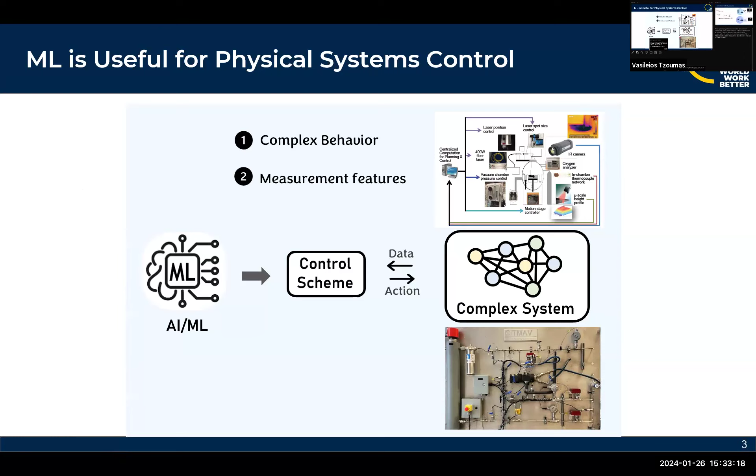Okay, so. Can you swap the slides? So, okay. Seems to be no option for that. How to do this? I'm not an expert. Yeah, okay.

All right, so, but we have problems with using the big data approach because generally you need a lot of data. And in addition, with the myriads of parameters you want to learn in AI, machine learning, big data approaches, it's hard to explain what's going on and therefore hard to provide certain certifications. And if you need to adapt your models in real time, it may be difficult to train in real time.

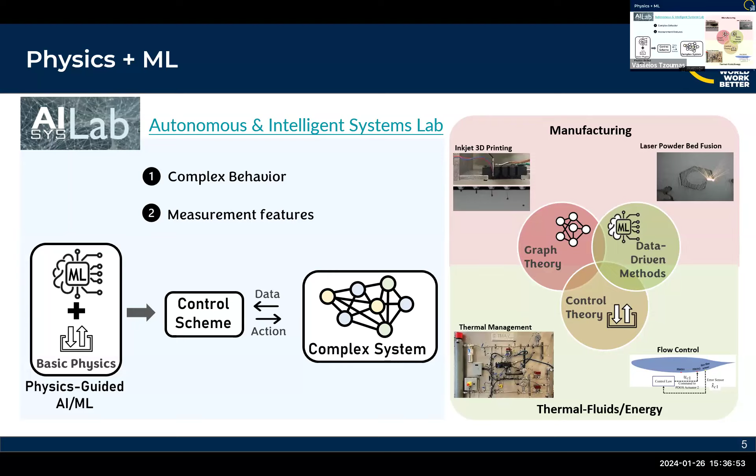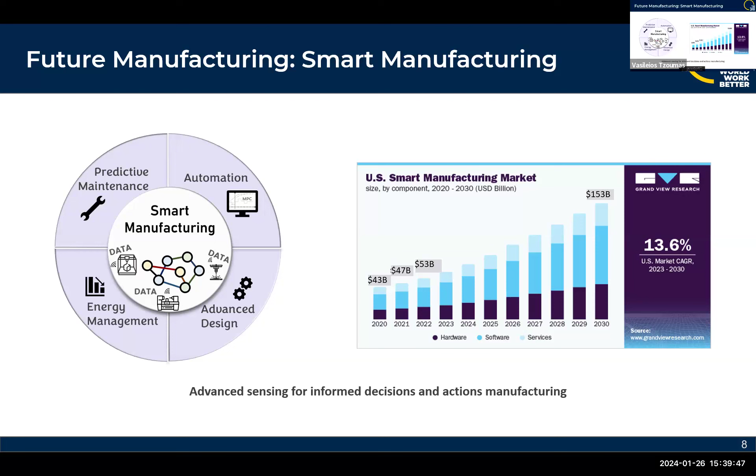Our manufacturing systems in general are becoming increasingly smart. And by smart, I mean there are additional sensing capabilities to enable us to actually do predictive maintenance, automation, advanced design, and energy management. And the smart manufacturing market is expected to grow substantially. At the same time, the manufacturing processes themselves are also becoming increasingly complex, especially with the advent of additive manufacturing.

We're able to combine additive manufacturing processes with other conventional processes, which is sometimes called hybrid manufacturing, or we're able to actually mix multiple materials in one monolithic part. The question here is, how do we use data to better understand and control these increasingly complex dynamical systems, given also the increasing amount of sensing capabilities we have?

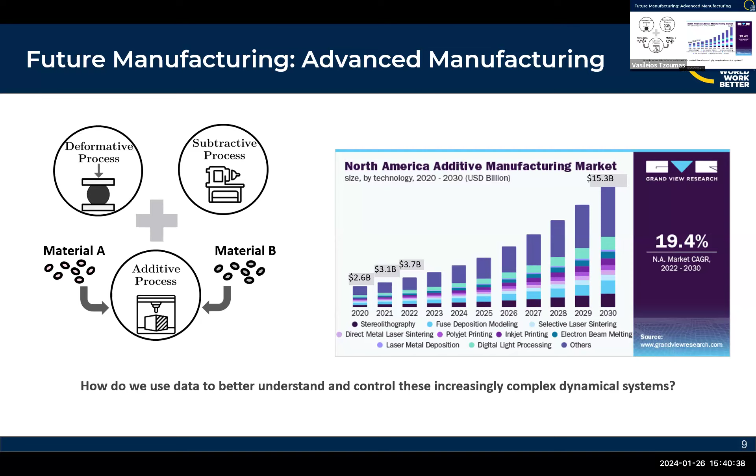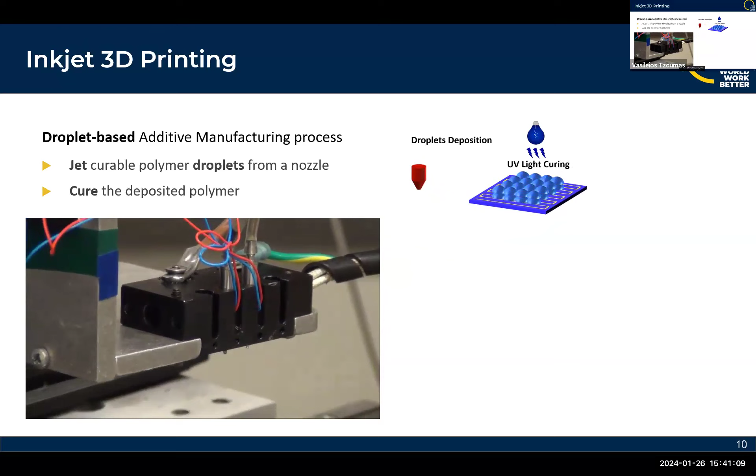So I'm going to talk about how we think about doing this in inkjet 3D printing. It's an additive manufacturing process that's droplet-based. It involves jetting curable polymers from a nozzle and then curing the deposited polymer. So typically, in the video shown here, you've had the droplets deposited, and then it's going to get cured. After curing, the process repeats.

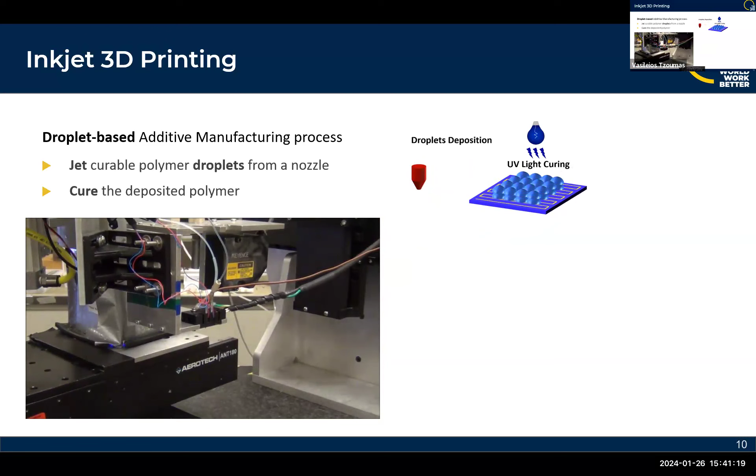This process is important for making parts useful for medical and dental fixtures, compliant features, robots, micro electromechanical devices, and very useful in bioprinting.

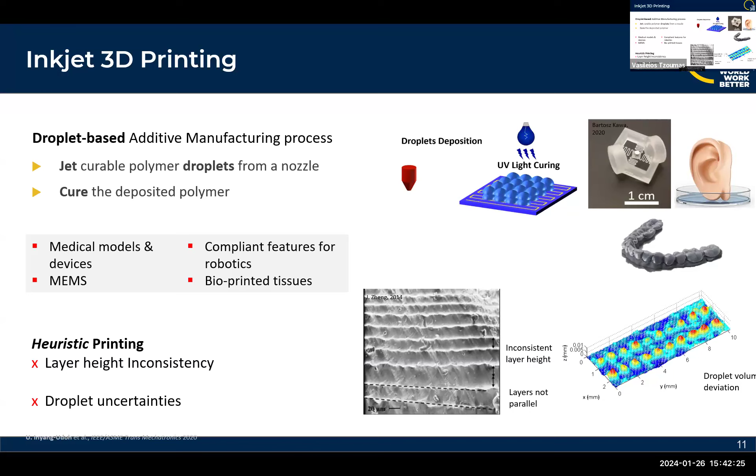Typically you carry out this process heuristically. You choose all the right combination of parameters and hope for the best. The problem is you may have layer height inconsistency, which this microscope image shows, and there are a lot of uncertainties in droplet deposition. You're meant to have equal droplet volumes, but there's a large standard deviation if you take the mean of the droplets.

This calls for controlling the process, but there are two perspectives to think about. First, low-level process parameter control, where you try to change or modify process parameters like the voltage waveform, pressure, jetting frequency. In our case, we have a piezoelectric nozzle, so voltage is important in driving the droplets out.

It's really hard to model what these process parameters exactly do on the output metrics, especially in a way that you can go back from what you want to the process parameters. Several works have used things like iterative learning control, fuzzy logic, and neural networks to some extent to achieve a relationship between these parameters.

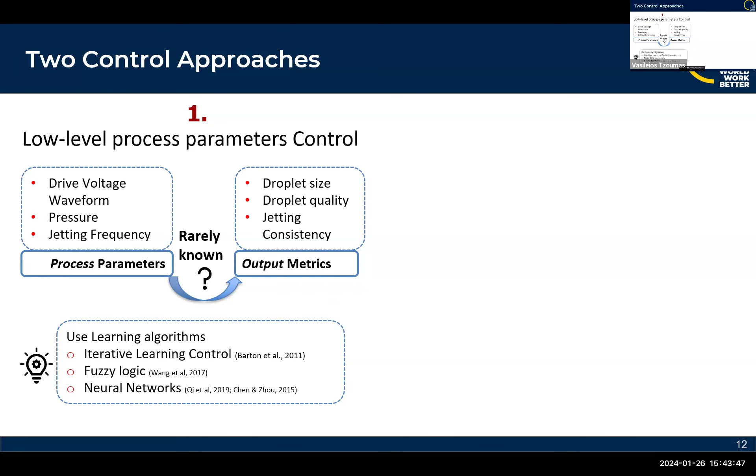But the second perspective, which is what I'm really interested in this talk, is geometry level control, where you're closing the loop based on the whole part geometry. So you're thinking from the input pattern you give to the output geometry that's produced.

The main thing you need to do here is understand the dynamics of the droplet deposition and interaction. It's very hard to do. There are finite element models for a couple of droplets, but in practice you're dealing with thousands of droplets. There are linear simplified, reduced order models suitable for controls, but they do not capture significant nonlinearities.

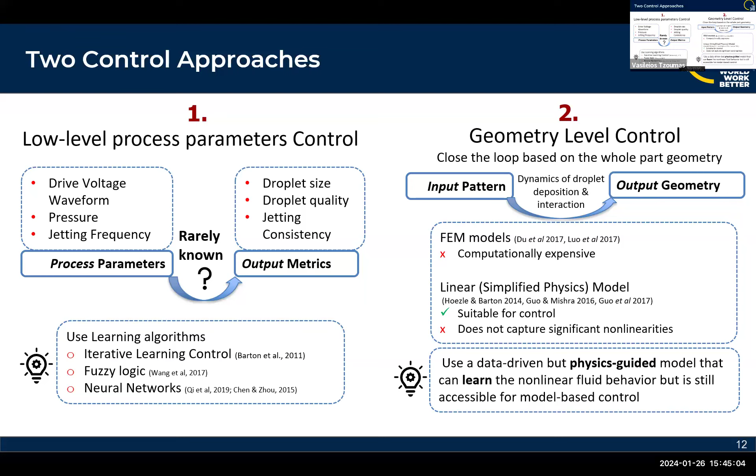So the idea here was to use a data-driven but physics-guided model that can learn nonlinear fluid behavior, but is still somewhat accessible for model-based control.

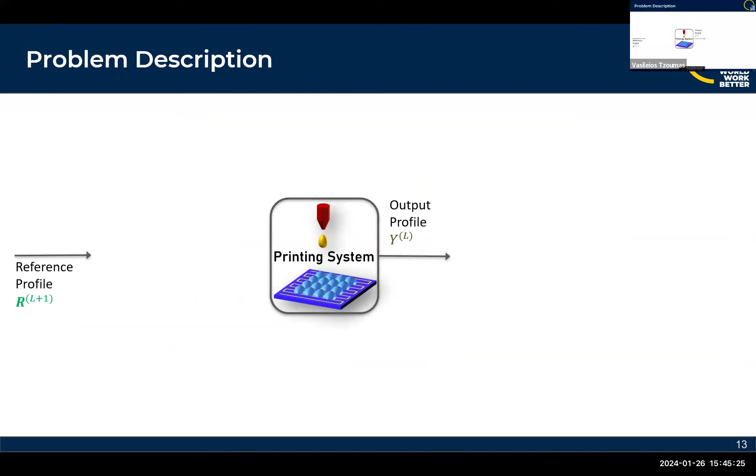If we think about our system, let's assume we just printed layer L, and we know the reference for layer L plus 1. For a model-based controller, based on YL and RL plus 1, we can generate input pattern UL that would give us YL plus 1. If we're interested in feedback control, we feed that back to the system and repeat the process.

So what we really need here is a model that relates the input pattern UL to the change in YL, that is YL plus 1 minus YL. I'm going to talk about two modeling approaches you could use for this.

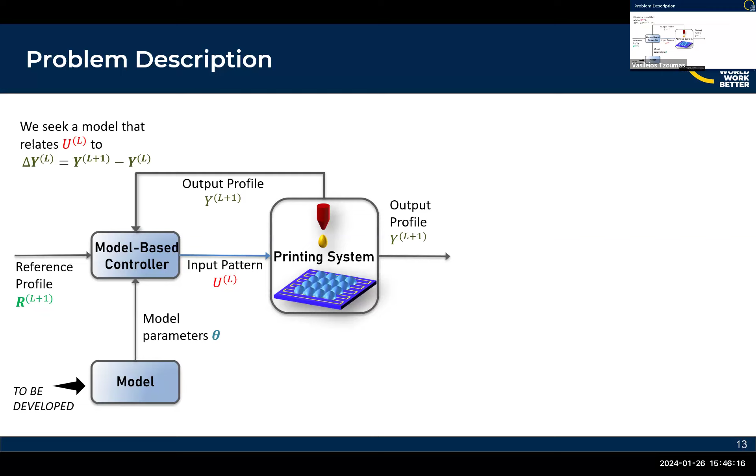And the drawbacks with them, to motivate why we're using a physics-guided machine learning model here.

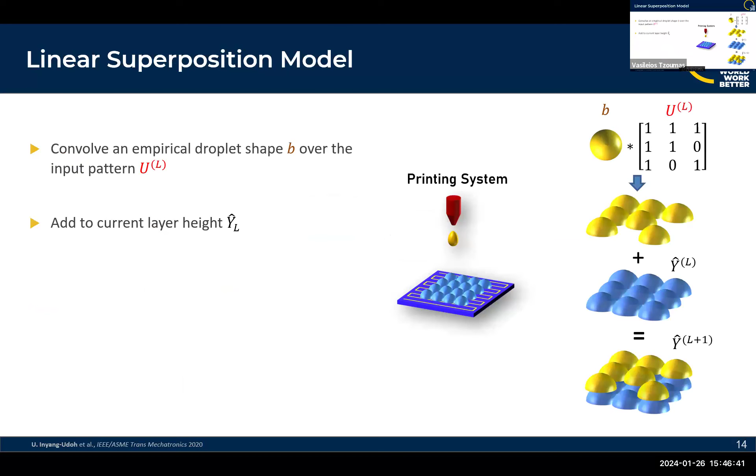The first is just to do a linear superposition model, which is very intuitive. Essentially you have a filter, you convolve it over the input space you're interested in, and add that to your current layer. But it doesn't work that well. This is a cross-shaped part: this is what the linear dynamics would predict, and this is the actual experiment.

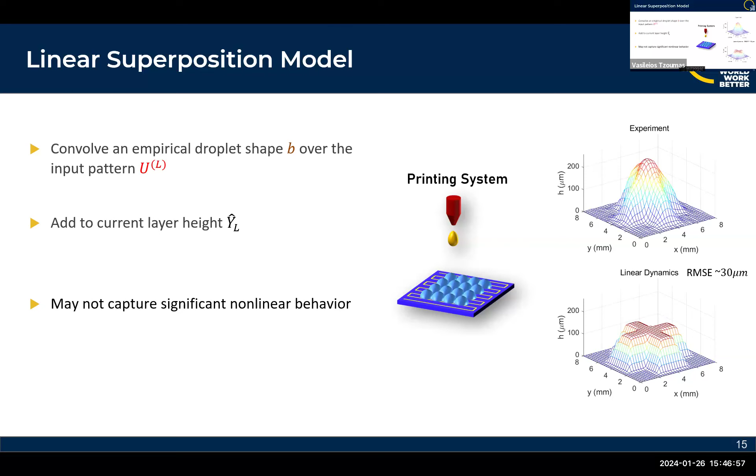The takeaway here is you really need much more data, and the more data you need, the more you need to increase parameters in your network. That's what led us to think about a physics-guided machine learning approach, where we combine data with some knowledge about the system modeling. That's what I want to talk about now.

If you think about the dynamics here, it's multi-scaled. There is a layer-to-layer development, and there is also a droplet-to-droplet evolution. We've been talking about the layer-to-layer development, but you could think about the droplet-to-droplet evolution, thinking about the process from that dimension.

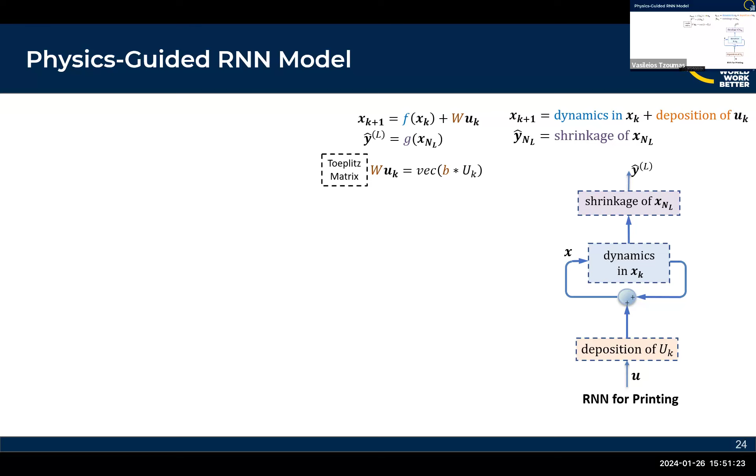We can write the input here, the input weight uk, as the convolution of B, filter B over uk. So W then becomes the Toeplitz matrix that corresponds to the convolution of B and uk vectorized. So we want to learn the convolution that captures the spatial effect of the deposition. That's what we have here as the input to the neural network.

But here's where the physics guiding is coming in. We want to learn that convolutional kernel or filter, but the convolution must be consistent with dynamics that reflect volume conservation, because we know there is volume conservation in the process, and a constrained flow, because we know there's surface tension constraining the flow when the droplets interact.

And so if you think about the input space as a grid with X there, and say we're interested in this point in red, we can transform the grid points in the domain that we're interested in into nodes of a graph. And then we apply an activation function that essentially is meant to constrain the flow.

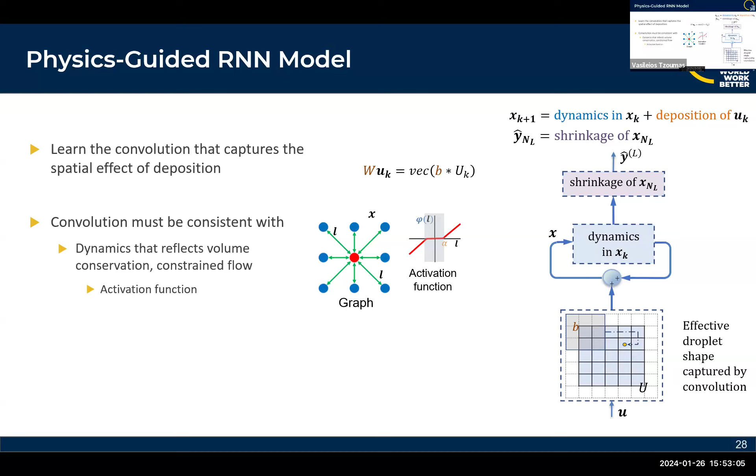And so this is the thresholding function we apply here as an activation function. So basically we're saying that if the height difference between any two nodes is not sufficiently large, it's in that dead zone in gray, you don't have flow. It has to be bigger than that to happen.

Okay, so we can write this as: we have the input, and then we have this incidence matrix, D transpose, acting on the state at any time, multiplied by the flowability matrix, essentially saying how much flow you will have in one time step.

So we apply this activation function that captures the effect of surface tension. And then we take the links back to the nodes domain by multiplying by the incidence matrix again, and that forms the recursion of the neuron.

So in all this, we don't know parameters B, F, alpha, and those are the parameters we'll need to learn.

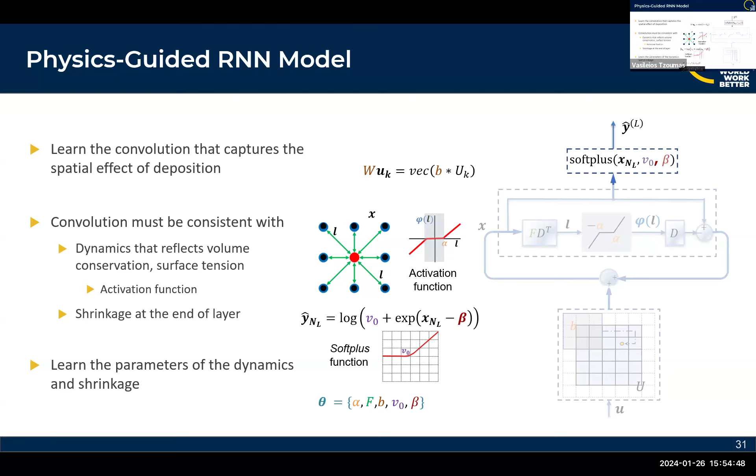So then to incorporate or to account for shrinkage at the end of the layer, we use this softplus function. It's important to emphasize that we're trying to learn the convolution B, the convolution kernel or filter, but we want it to be constrained by things we know about the process.

Okay, so we can write the convolutional neural network in this way, and we can unroll it as shown here. And one big problem with recurrent neural networks generally in training is that you could have very unstable gradients. So when you calculate the gradients, if the time step is very long, it could be exploding or vanishing gradients.

So in this case, what we're saying is that we're going to train the network based on the data we're storing. Either it's stored, or we even want to be able to train based on data on the fly, or online.

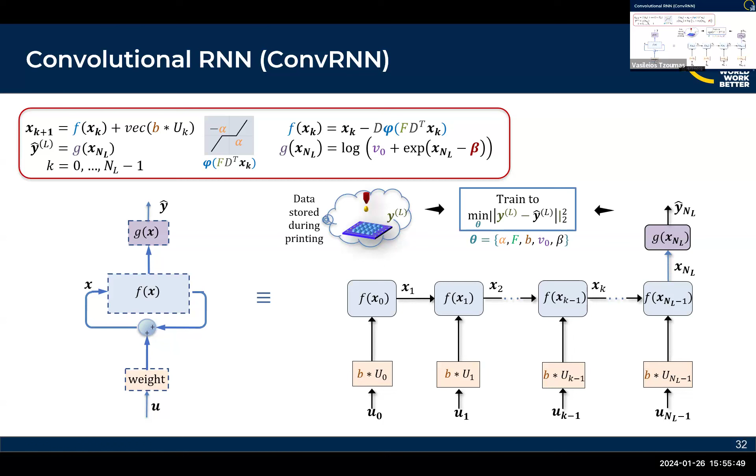Okay, so you've got this nonlinear discrete time system, and as I understand it, you're encoding conservation of the flow as constraints on the F and the D matrix. Is that right? Is it not, am I not understanding?

Yeah, so I mean, that's right. The other thing that we're even doing here is in the selection of what we're using for an activation function, we're making it reflect that, although we don't know yet the parameters alpha.

But in addition, what's interesting is that of course there are conditions under which you're going to have stable gradients, and it turns out it corresponds to conditions for the dynamics as well to be stable. So yeah, that's what we're trying to do.

Okay, so as I said earlier, training stability is a big concern, and we can show that if we have the big matrix F to be just a constant times the identity matrix, which is what we do in this case for simplicity.

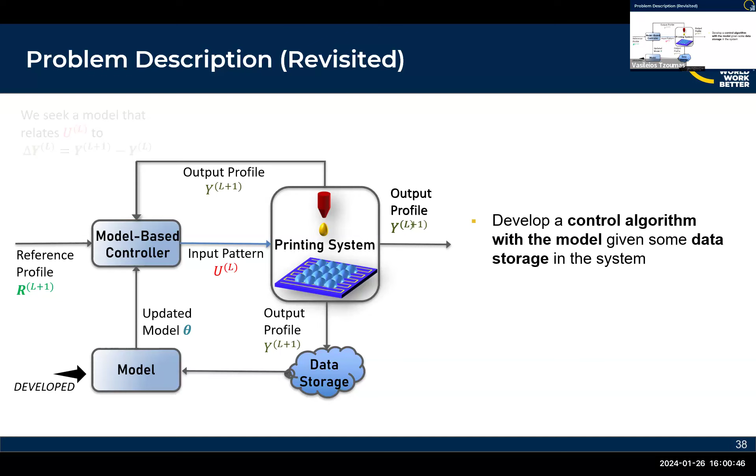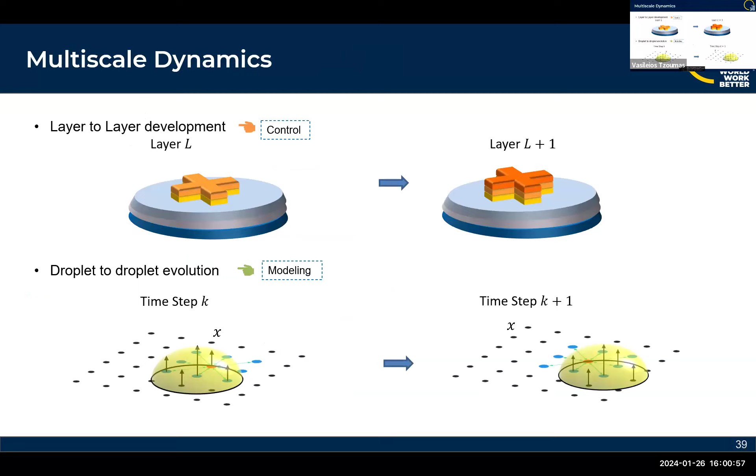As I said earlier, we have 2 time scales, and we've tried to model from droplet to droplet, but we're interested in controlling from layer to layer. So in order to do that, we basically need to take the time dependency away from UK and take it to BK, so that we are trying to really optimize with a certain U. And you could do some algebra and eventually arrive at this.

This convolution here is basically equal to BK UL. Well, we already know what BK is, so we can get BK for each time step because we already learned what the actual kernel is. So we can write the dynamics in this way with the matrix BK UL.

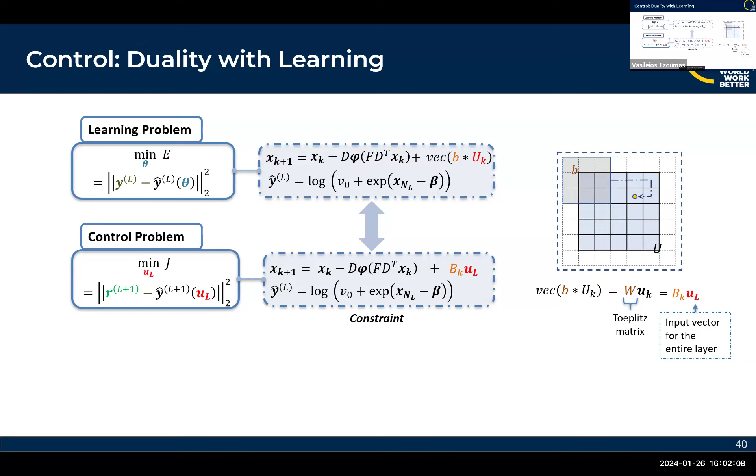And our control problem then becomes to get UL that minimizes the reference minus our prediction of the output profile. So basically, it's a reference tracking problem.

What's interesting here is that we basically need the same gradients, or most of the same gradient terms, that we used in getting the parameters as for the inputs. And we already showed that, in training, this term has a spectral radius less than 1, so it wouldn't explode. So we're sure that when we're trying to compute our controller, we'll achieve a result because the gradients are bounded. That's very important, because if the gradients are not bounded, you can't really guarantee that you can calculate a controller for the dynamics.

So if we think about it for Z time steps into the future, we can think of it as a model predictive control problem constrained with how much input you can put into the system. You can't have negative inputs, and there's a limit to how much you can get. And the gradients for all the time steps into the future is just the sum of that for each of the layers.

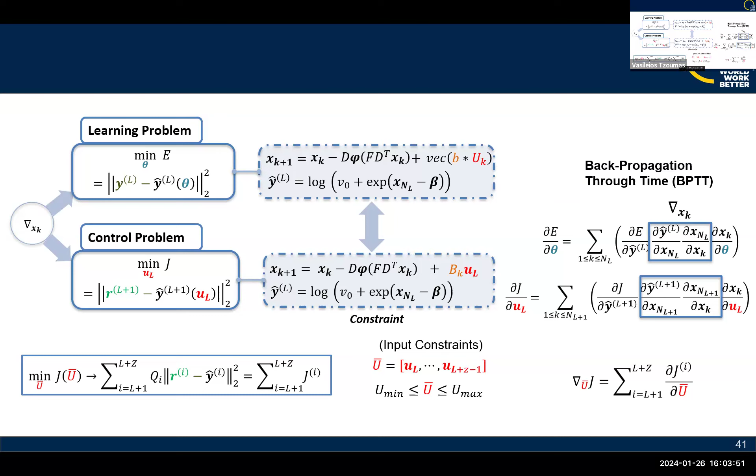So with this, we can get a predictive controller, and back to the big picture. Essentially, we have our system here, and we're trying to make control decisions based on the physics-guided model given data.

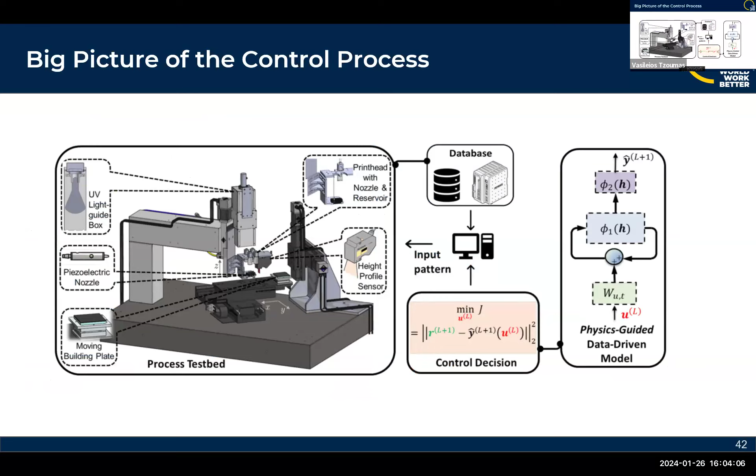So what we do here is we learn the parameters of the system theta based on a 4-layer cross-shaped part. We know the input pattern, we know the output, and we use that to get theta star. Then we control based on theta star: we have a reference, and we use that to get the inputs. We do that for the cross shape, a T shape, and an N shape part.

So right now we're just assuming we're doing feed forward control. We're not doing any feedback.

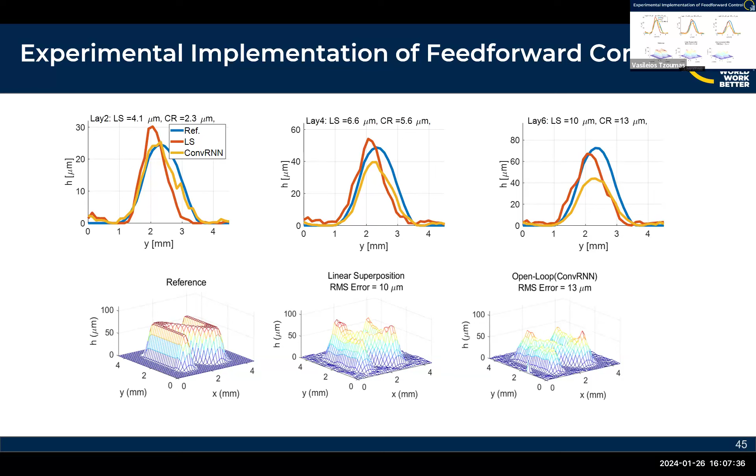Okay, so that's what we try to do. We have our cost J, we send in an input pattern, and that's the open loop or feed forward implementation. But we want to close the loop, send back the height profile information. In addition, we want to see if we can update our neural network parameters.

Well, the problem with this is the training - it could take quite some time, but what we're going to exploit here is the fact that the process itself is relatively slow. In addition, we found a way to cleverly exploit the printing in between layers to learn proactively. I'll explain what I mean by that.

So let's assume we're trying to print a six layer part. We compute the control pattern for the first three layers. We print layer 1, we print layer 2, and then after layer 2, we take measurements. Then we let the process proceed, but we begin to update the parameters.

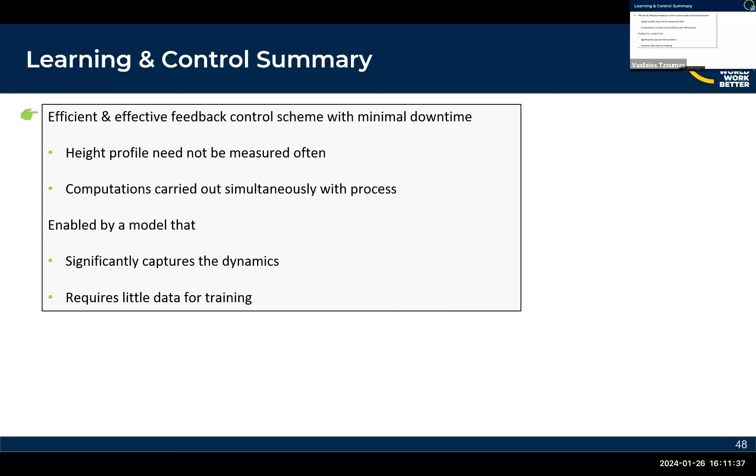So, to summarize, we've been able to show efficient and effective feedback control with minimal downtime. Within the process, we don't need to have the height profile measured often, because our model is a relatively accurate representation of the process. And the computations can be carried out simultaneously as the process proceeds. This is enabled by a model that captures the dynamics and requires little data for training.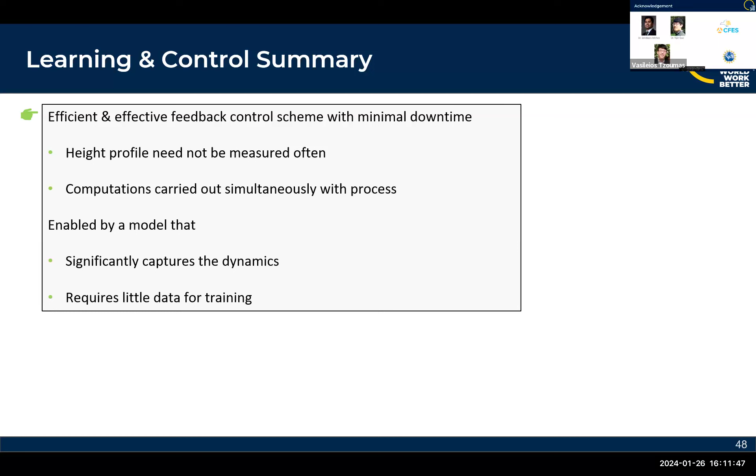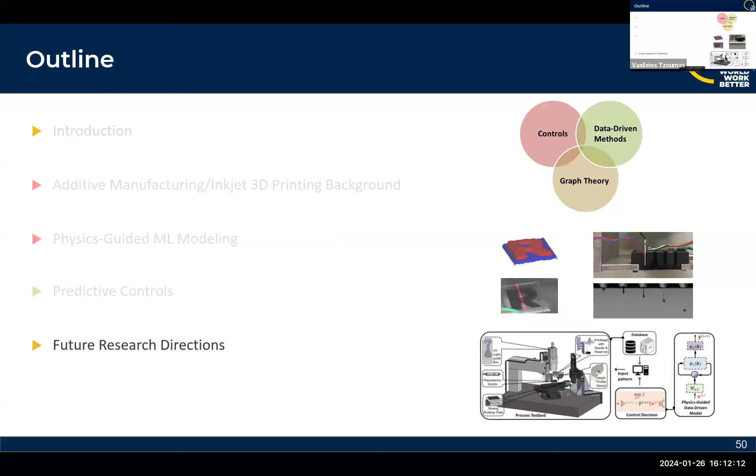So in terms of future research direction, there are currently two ways I'm thinking about in this area. In what I've talked about so far, in the jetting process, we're using a piezoelectric nozzle, and we send in some voltage waveform, and that deforms the channel and squeezes out ink.

What this is showing is the pressure distribution with time after injecting the voltage, and then we have a droplet form. So what I've shown so far, we heuristically determine what is a suitable waveform for a good droplet in terms of stability, speed, or satellite formation. The satellite formation means that you have extra droplets being deposited after the main droplet has been deposited.

Previously, we're using a discrete input pattern space. We calculate our inputs, but we have to discretize them because we cannot online modulate the droplet size. So one future direction I'm looking at is being able to modulate that droplet size as the process proceeds. The relationship between the voltage waveform and the droplet properties you eventually have is quite complex, and going back from the desired droplet to the waveform you need is an interesting problem. So that's one of the things I'm looking at.

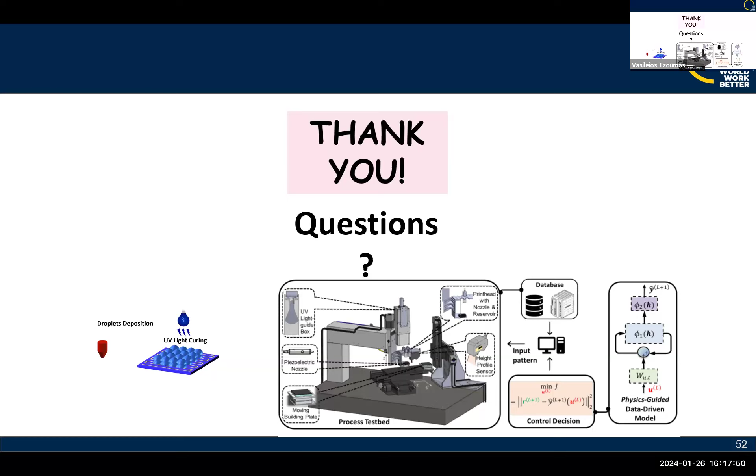It was really interesting. I had a question about droplet to droplet variance in volume. I think it seems like in the future work, you'll kind of get to that with waveform optimization and making sure that all the droplets are stable with no satellites and stuff. But I didn't know if with the current model that you have, if that was an issue that you noticed, or if it's fine, if the droplets seem to have pretty low variance throughout.

I mean, they do have high variance, but if you're compensating from the geometry standpoint of things, it tends to even out over time. But yeah, that's a really challenging problem because the deposition of a droplet due to a waveform is very finicky. It's so much dependent on how much the conditions are just right for your nozzle to shoot out the droplet.

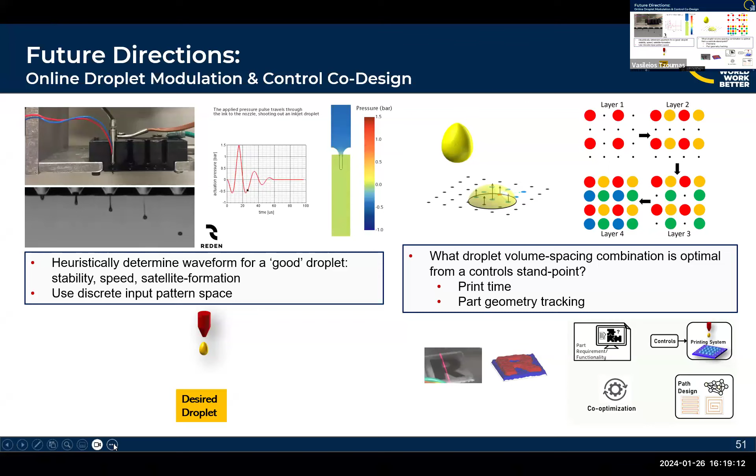Questions? A question about the recurrent neural network. Okay, so I imagine the dynamics of different layers will be very different, from maybe the base layer to the very high layer. So I was curious, have you tried using different parameters for each layer? So not just unrolling a single layer of the recurrent neural network with the same structure, but different parameters based on the layer.

Because we wanted it to be geometry agnostic, we intentionally wanted to learn geometry agnostic parameters. So let me see if I can pull it up here. The parameters we set up were intentionally such that we wouldn't need different parameters for different geometries. How much we're able to achieve that is a big question. I think we probably need to do more investigation into how much, but our results have shown good performance.

It becomes rather difficult if you have so many different parameters you're trying to track. But if you can have a set of parameters that are invariant with time or geometry, in time and space, so to speak, you have a better chance.

Yeah, my question is more like, I understand you want the geometry across the XY plane to be agnostic, you don't really need to know about it, but I was wondering about the parameters between the height. So essentially you have an unrolling layer of the network, and what if each layer has the same structure but different parameters? So this is within one layer. This is from time step to time step, not from layer to layer. I see, yeah.

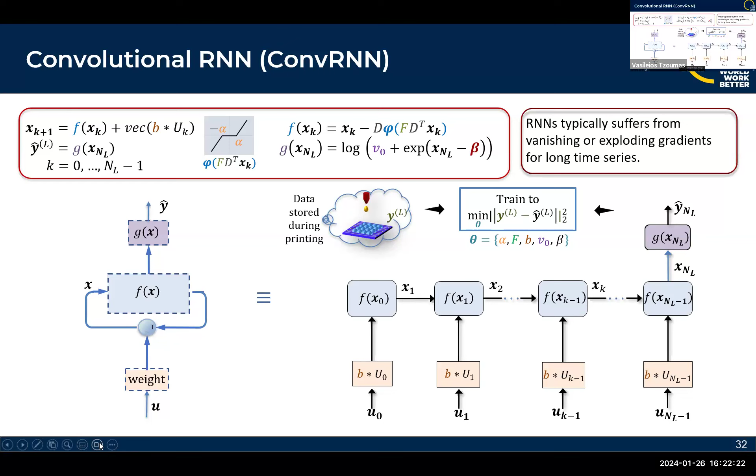Okay, so here are all the parameters I'm learning. We have the alphas, F, B, V - let me go to that slide, maybe it will be helpful.

Essentially at the beginning, in this case we did a warm start - that is, you identified parameters on something else already, and then based on that you calculate control input for the next, say, 3 layers.

Then after a printed layer, that's the second layer, I go back and, based on the information I have on these 2 layers, retrain my neural network.

So I identify the parameters theta, which was on the other slide, and based on that I try to calculate the input - not for layer 3, because layer 3 is going on simultaneously as I'm doing the computation, but for the next layer, layer 4 - and continue the process.

My question was, I don't understand what information you're collecting on layers 1 and 2 that you feed back in. Oh, okay, so it's the height profile data.

So what I'm using to train is: what did I send into print layer 1, what was printed, what did I measure? In this case I'm only doing it after the second layer, so I'm using what information was sent in for layers 1 and 2, and what did I measure - the height profile, using a 2D laser scanner to scan the height profile.